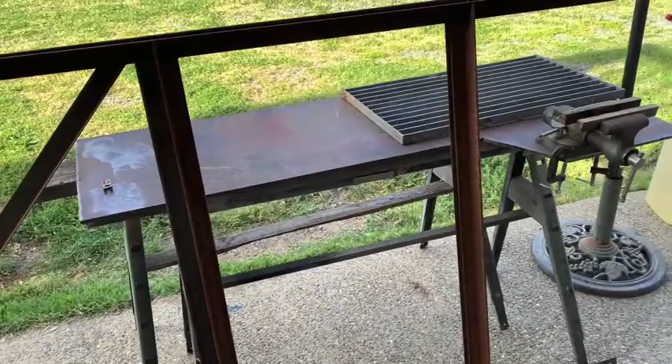Today's project: get that welding table on a platform that I can move around, get it off the sawhorses. So I'll be back and show you incremental work as I get her done. Right now I'm going to sit here and just look out across the country and have my coffee.

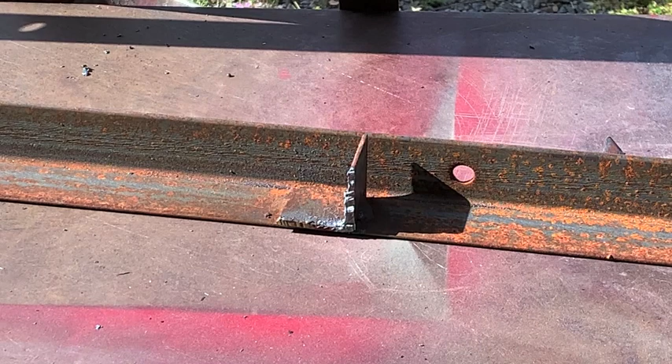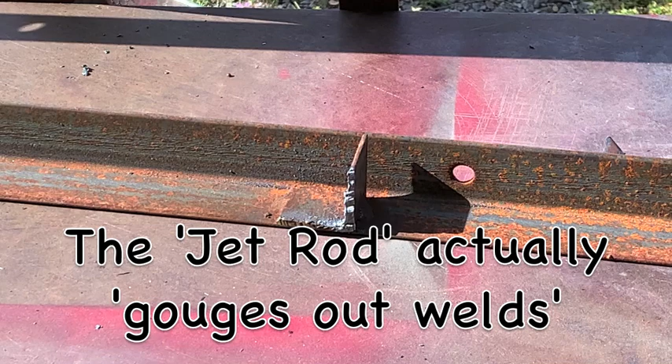All right, here's a little something I just discovered. I used to use this thing called a jet rod in an AC stick welder, and it blew out welds. It was a 225 amp rod that you run. I think I can do the same thing with this. Let's see here.

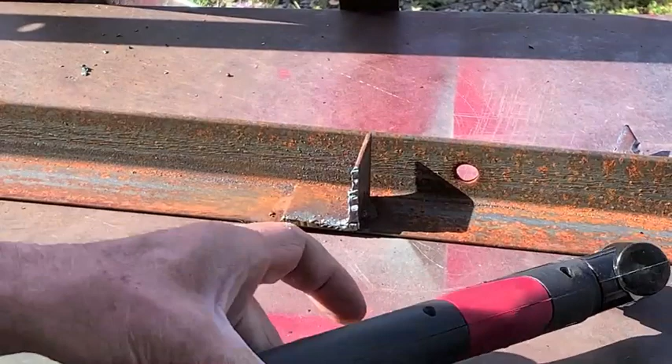Clean surface helps. And there's a tack weld right there, right here. Nothing, yeah, there's a little one on the back too. So let's see if we can wash that out.

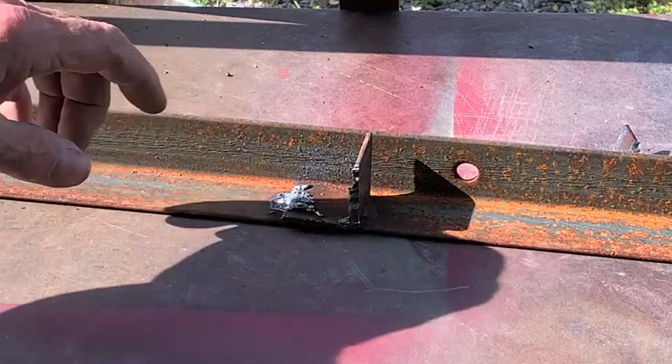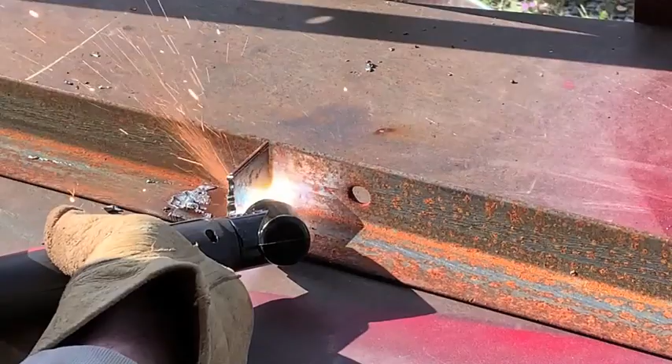All right, dip down a little bit towards this metal, just trying to hit that weld. We'll see if that's enough. I don't know if you guys are going to be able to see the back side of this or not. All right, let's see what that'll do. I got an old chisel here.

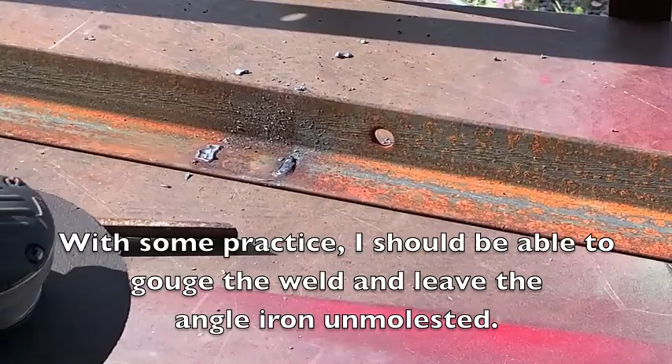Bingo, there she went. So now a little bit of grinding, zip zip, and it'll look like this joint right here. All that metal can be freshened up with a little primer, and you won't even know it's been welded if you don't look too close. Pretty slick, eh? I think that's pretty slick. I'm loving this little plasma cutter. Never had one before.

Well, I had intended to start welding that table together today, but we're kind of rained out. Shop's closed down, water dripping everywhere. So it looks like I'm gonna get a break today. So I'm enjoying the weather. We need rain out here. I think this is just a one-day event, so I'll be back on it tomorrow.

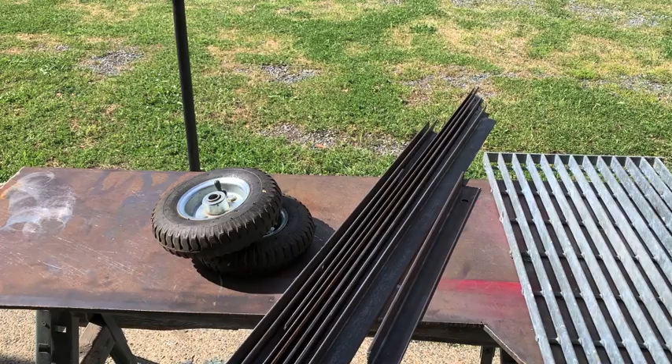Well, we got some pretty weather out here. Gonna start doing some welding today. Got some wheels, got some angle iron I cleaned up from the scrap pile at the hardware store, and I've got this grate here. I've had it kicking around in the barn forever. I figure that'll be a good little table extension for the plasma cutter. And I'll show you what I mean.

I think I'll hinge it right here off the front, so when I'm not using it, it'll fold down, and then fold it back up, lock it in place, and then I can lay things on here and use the plasma cutter without gouging this table. So I guess I'll get with it now, see what can be done today.

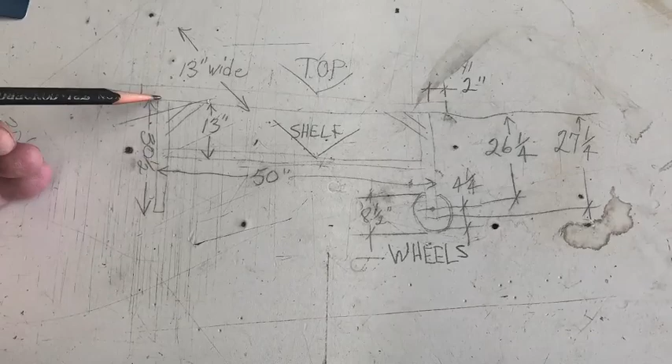All right, this is the plans. I've got the table here, side view, there's the front wheels on it. It's going to be a shelf in there, 13 inches down. That'll be handy. We'll put expanded metal in there. I'll have to go get a piece cut.

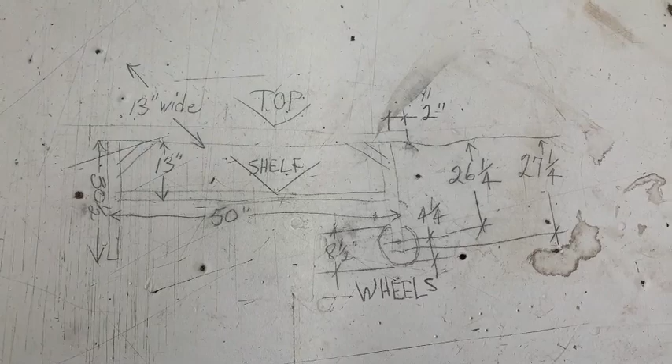But I think I got all my dimensions worked out. So that's what I think I'll do right now, is get a bunch of angle cut up, flip that plate over on its back, and then line it all out so this will weld on and give me like 2 inches of space all the way around so I can use clamps. So that's the plan for today. We'll get back at you later.

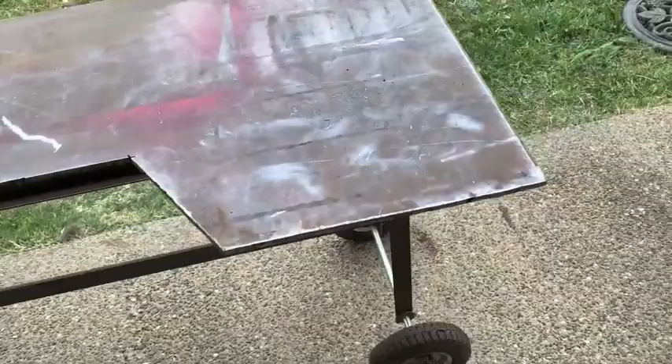Well, there's today's progress. Cut it all. It's completely welded out. Probably needs some gussets here and there, but it's strong. And I made these wheels wider on one side because of that top. So I may have to gusset that axle a little bit. But there it is.

Man, it's gonna be so nice. I don't have to keep pulling those things out and putting the steel on top. That's enough to give a man a hernia. All right, I'll be back when I get some more done. I got a day of rain coming, so it looks like I'll take a day off. Thanks for watching this, fellas.

Well, it's Friday. Rained all day yesterday. Kind of clear, but kind of not clear. I'm not sure what it's going to do, whether it's going to cloud up later or what. But I used today to go down and get a sheet, a quarter of a sheet, of expanded metal.

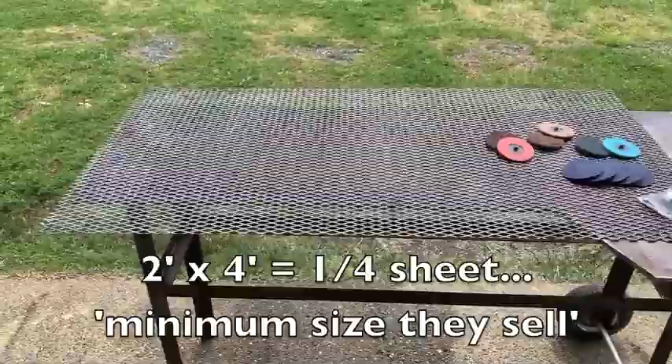This is the stuff, real thin with 1/2 inch openings in it. We're going to use it to line the bottom of that shelf there, so I can throw grinders and stuff on it instead of leaving them on the table while I'm working.

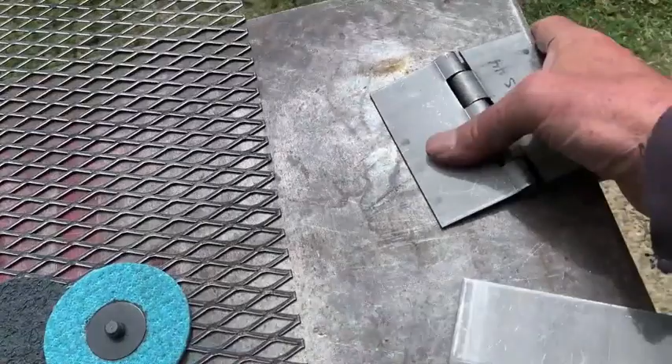That's a big advantage. Also picked up a couple hinges that are going to go underneath here, see that? This will facilitate putting that big piece on the end of the table. Now I can hinge it up and lock it in place. I haven't figured out how I'm going to do it, but I will.

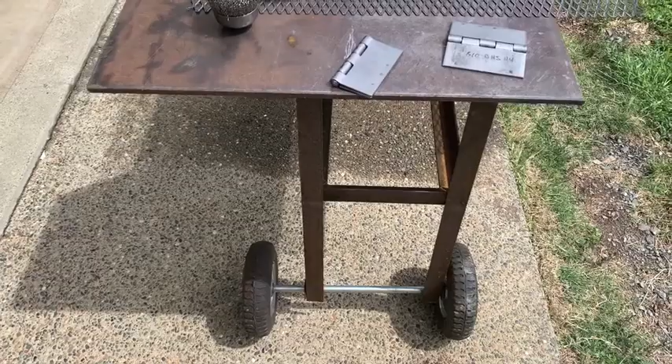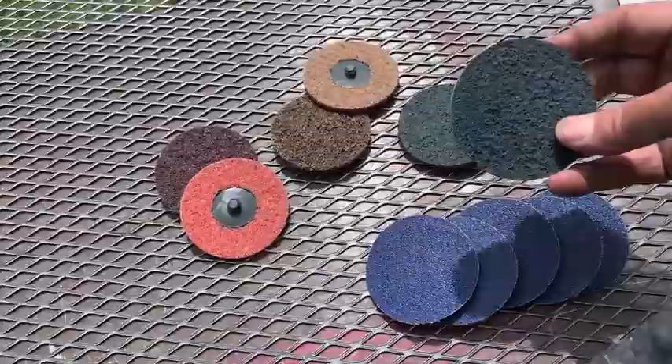And then I picked up some more little pads here, I think they call them Scotch-Brite pads, of various grit I guess you could call it. I haven't used 3-inch on my little grinder before, so I picked up a new driver and some new pads to try that out. I don't know if my little air right angle grinder will handle that diameter efficiently or not, but then I got another brush for cleaning up this angle iron before I paint it.

Just for that little bit of stuff, that sheet of expanded metal, those little parts there, 145 bucks. Can't believe the prices of stuff today. It makes it hard on a do-it-yourselfer who likes to make things out of other things they've scrounged over the years, and that stuff there I just can't scrounge. I scrounged my wheels years ago and hung onto them figuring I'd use them, and there they are, but damn.

That's the way the weather is. I doubt I'm going to tool up and get started today, day's mostly over, about 2 o'clock now. So maybe we can get with it tomorrow. See you then, boys.

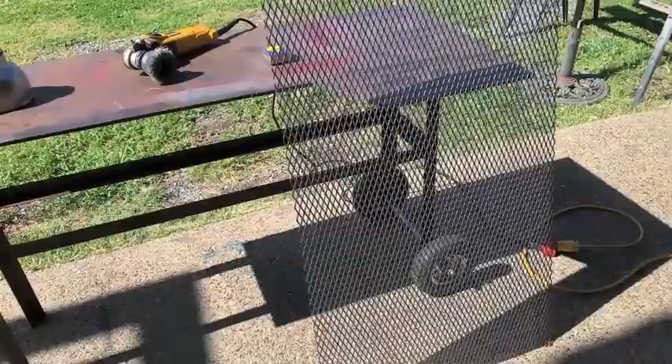Well, here's our nice day back. Rain's gone for a couple days, then it'll be back for 3 or 4. So see what we can do about this shelf. I'm ready to rock.

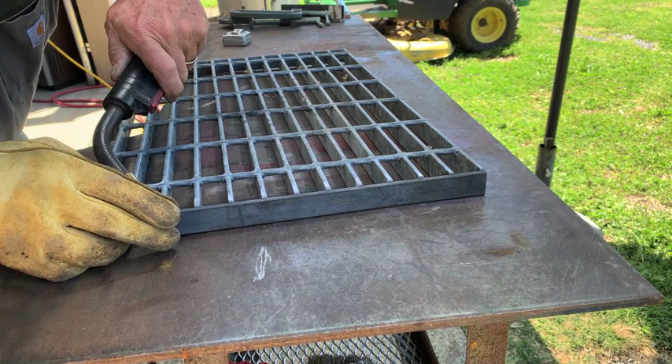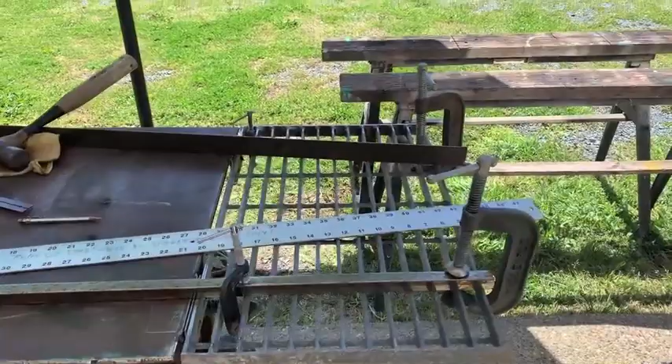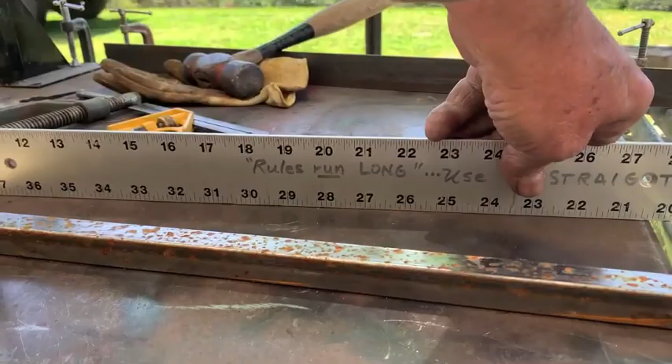Well, I thought I'd film as much of this as I could to show you how I'm building this thing. I've got hinges, you can see them sticking down, tacked in and squared off. Now I just got this grate put up, got it level with the table going back that way, so things can slide on and off without snagging.

But this filming is getting to be a real pain in the ass, so I'm going to tack this thing on up a lot further before I come back on. So that's where we are right now.

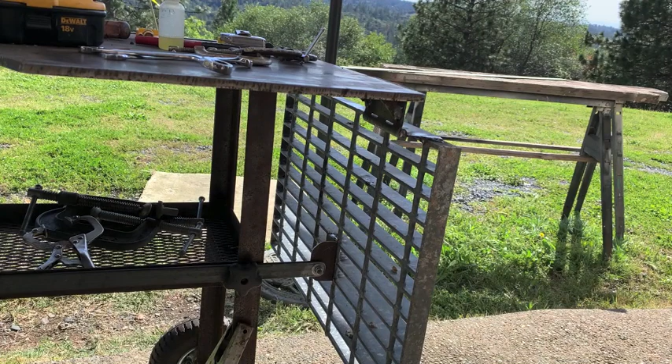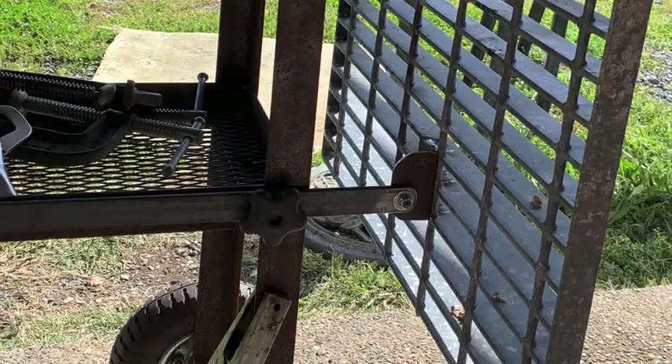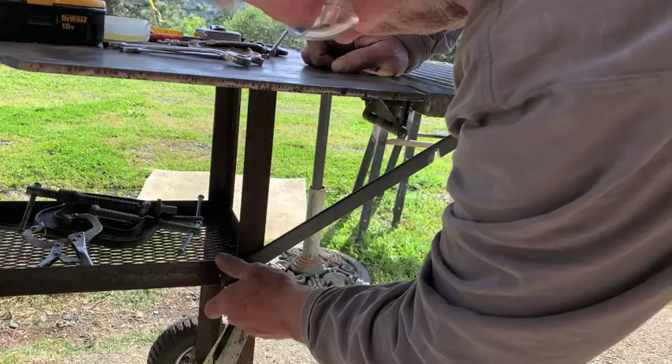Well, let's see if we can get this on video before I run out of poop. I've been up and down on my butt working under this table for a couple hours. Here's what I got: a thumb screw here I can loosen, then I can raise this bar up, it plops into place, that tightens down, and I got a solid surface to cut on, nice and straight. That's the whole shivaree for today.

Boy, I didn't think that was going to be that much work. That's too-close-to-the-ground work is what it is. Yeah, there's another look at it there.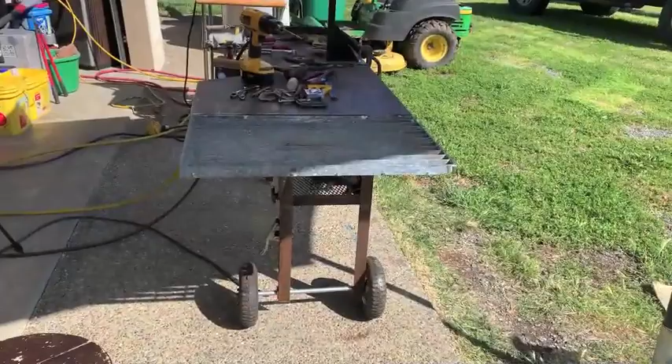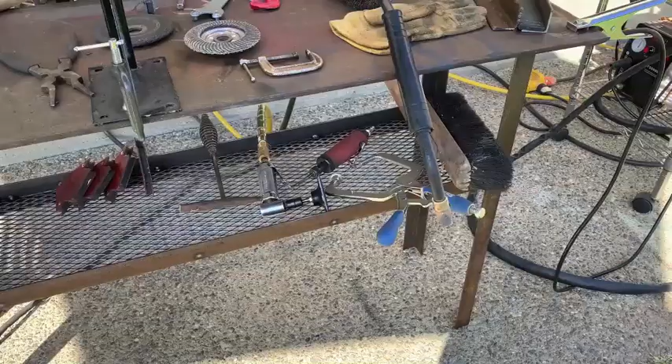It's going to be nice. Pull things out here and cut off of them. I can see why I wanted that shelf down there, look at all the crap that collects while you're working. Now I got to get in the habit of using that shelf, see?

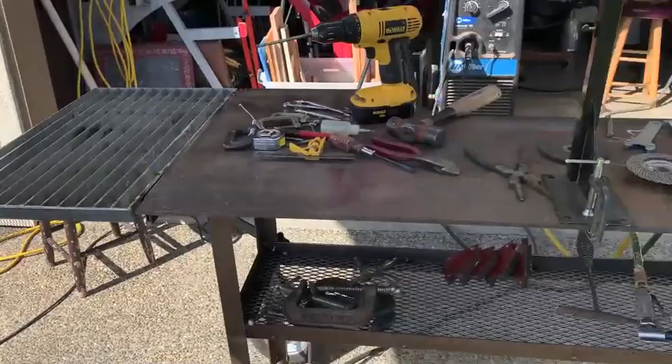Well, I got a few gussets to put in here and there, and want to put some little squares on these feet here, so if I take it out in the gravel it won't dig in. But that's about it.

Probably next time you see it, I'll have it painted, and that'll be the end of the movie. All right, thanks for watching, boys.

All right, Saturday morning, sun's shining. We got just a few things to do to wrap this job up. Get some paint on it today. Start out with the feet.

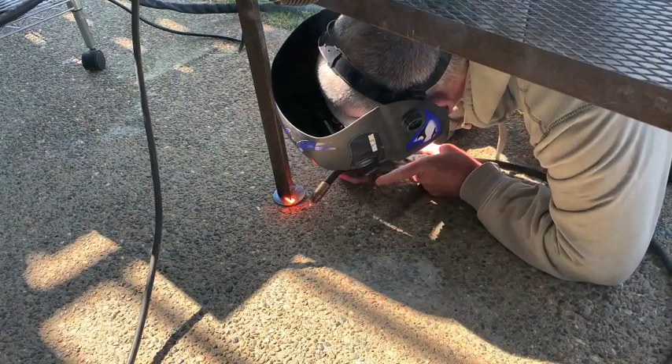Okay, here's the first gusset going in. We'll have 4 under the table here. See if we can get this stuck in here without any problems.

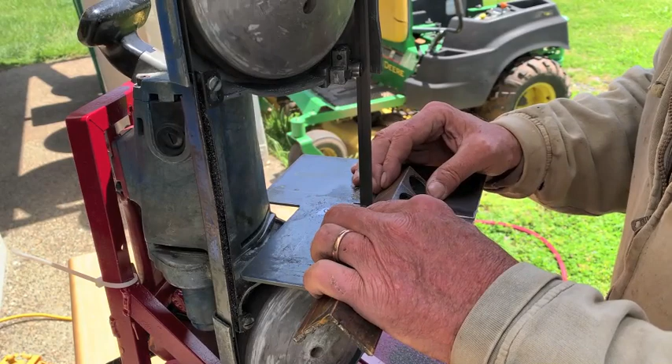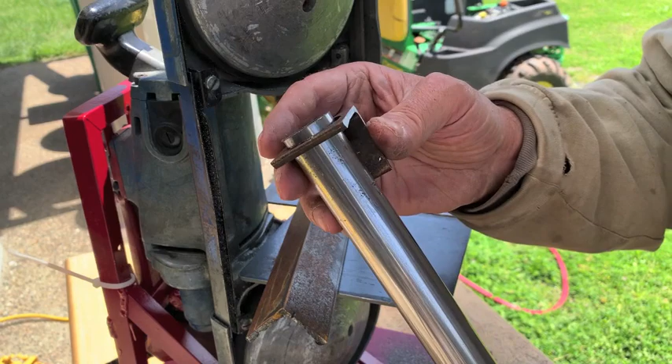I forgot about doing the handles, so I gotta have something they'll slip on, pull out, and I can push it around. So that's what this is all about.

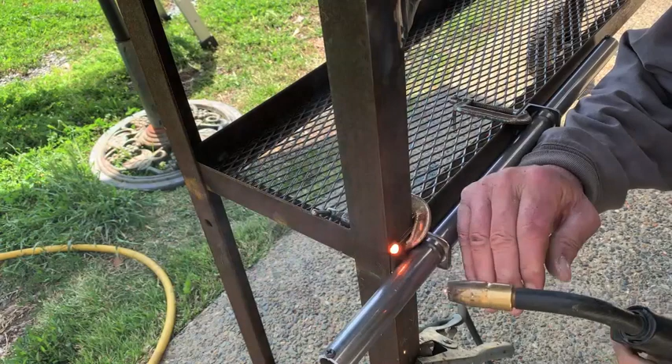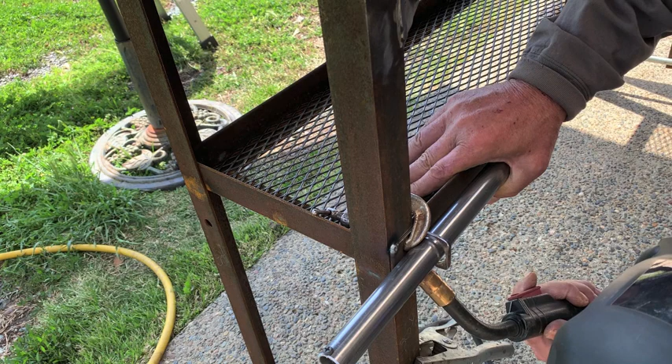Welding's done. I've got these handles here that push out, so I can pick it up, push it over there to the other side of the yard buggy and store it over there. You never get your day's work done.

You know, this video is getting awful long, so I'm not going to paint this thing and film more of that. Just imagine the bottom part of it all red. So there you go, my red welding cart.

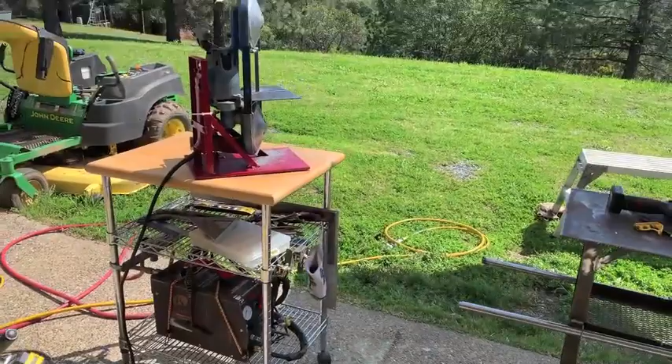That's it, boys. This has been a long project. Thanks for watching it if you stuck around. I'll be catching you somewhere down the road with another project, hopefully using this table and all this other stuff I've been building up to have a better fab shop.